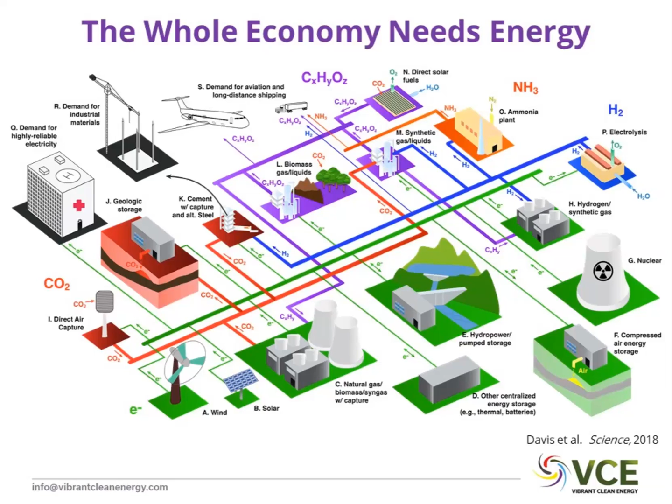This is a broad overview, very simplistic, not capturing every single last aspect, but it gives a framing of how I think of the problem, and how work has started from VCE in the electricity sector and is broadening out to all the other sectors. We model everything in four colors: green first, then blue, then purple for synthetic fuels, and finally red for direct capture of emissions. The way I conceptualize electrification is that we electrify by directly providing electrons for other sectors. There's light duty vehicles, heavy transportation, heating for both space and water, as well as electrifying cooking—what we'd call traditional demand—removing gas hobs to electrify them will change the profile of that electrification.

The fifth one's kind of a big one, which is hydrogen, which unlocks quite a lot of other areas. I still think of it as electrification. We're just adding an additional step, which is to then use hydrogen as a stable chemical bond to actually transport around or use for other areas where heat is either required or we actually need the hydrogen itself, for example, in ammonia or in producing steel. We actually want the hydrogen, not the heat or energy, or both.

And so we use this to blend with other sectors. So some people may not be able to get a space heat pump in their climates, and so we may want to use hydrogen to not have that be electrified fully.

I just want to note at the end, we do this kind of in the backdrop of we're also considering what climate is actually doing to all these sectors as we move forward in time. So one thing that we've added recently and been thinking about a lot is we have used a lot of historical data, and we continue to use historical data, but the future keeps changing. And depending on what path we're on, it might change very much how much we can rely on, say, heat pumps for heating versus needing hydrogen for heating demands. And I'll get onto that in a little bit towards the end. I don't want to go too deep into it.

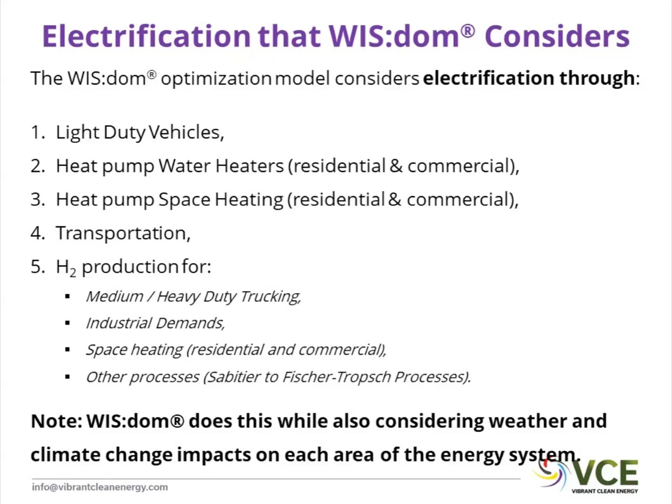So part of that is the model meeting electrification goals in the early years, but also that we're building out systems within the electricity sector to reduce emissions there as well, that then unlocks the potential later on for the next 20 years to really drive up electricity demand. And so in the electricity demand area, we're seeing a doubling of the number of electrons needed for the customers. And so that's quite a large increase.

And this is basically reaching around a 95% decarbonization of the electric sector. Sorry, 95% decarbonization of the energy sector by 2050.

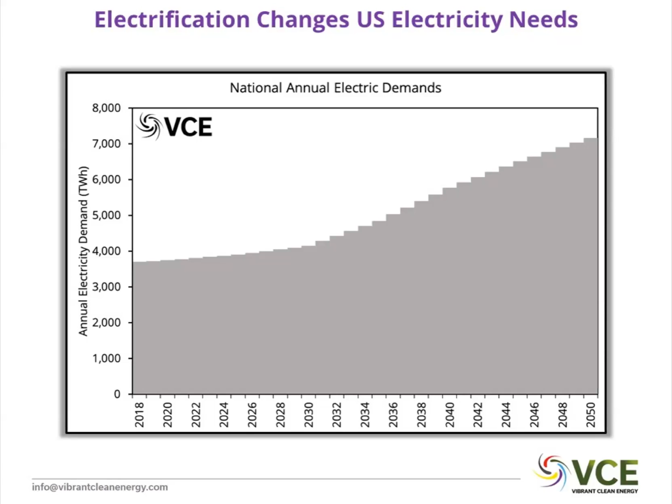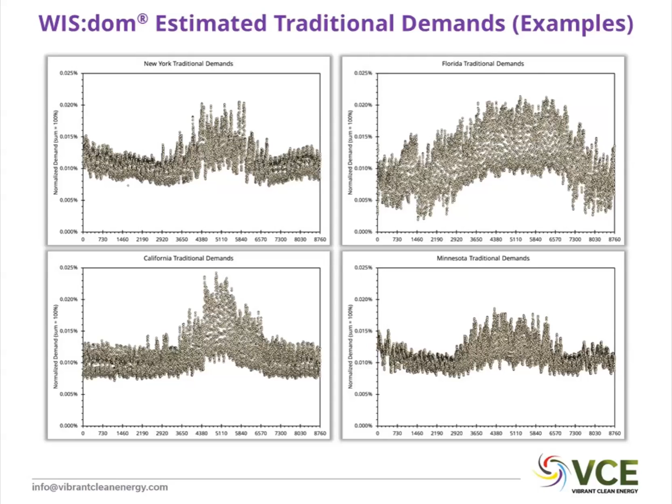And the reason I want to show this is just how different these shapes look when we bring the weather in. So these are simulated demands, but they're also tied to realities of what happened in the weather years that we're looking at. And we've stripped out any heating or transportation that's already in the electric sector because they're going to be modeled separately. And Florida looks very different to New York, which looks very different to Minnesota. And so already we're going to start seeing things change as we push forward through time in different states if the load grows at different rates.

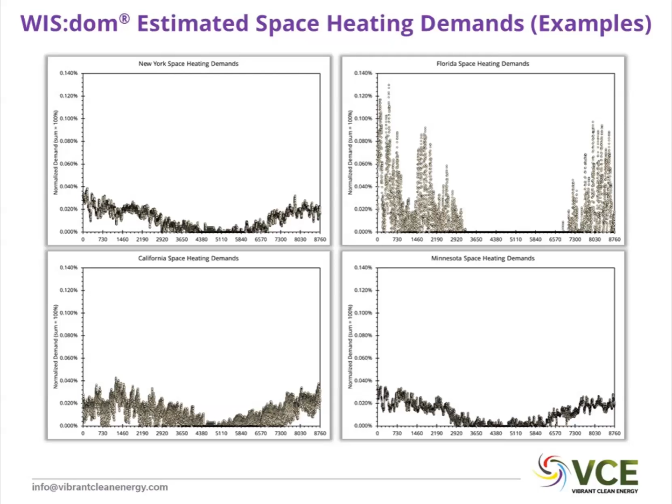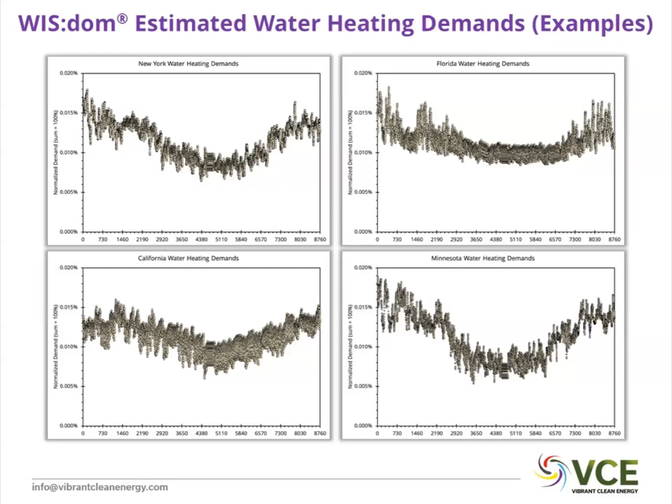And what we're doing here is we're tethering these to the weather as well. I'm going to show you the same thing here for heating. I won't go into too much detail here, but you can see each of the states is more similar now. And that's because for water heating, most of the technologies we use are very efficient. They're also well insulated, and so the differences aren't as big. But as you can see, there are differences even in those regions as well.

And then finally, looking at transportation loads, we bring in a bit of social behavior here as well, how people drive, how much activity there is in the transport sector. I'm going to caveat everything right now with, what's happening now in COVID-19 is going to be something that we're going to have to investigate a lot as a society in terms of how that will change the demands, both near term, but also how it might change things going forward. Maybe things will change, maybe they won't, maybe they'll just rebound back.

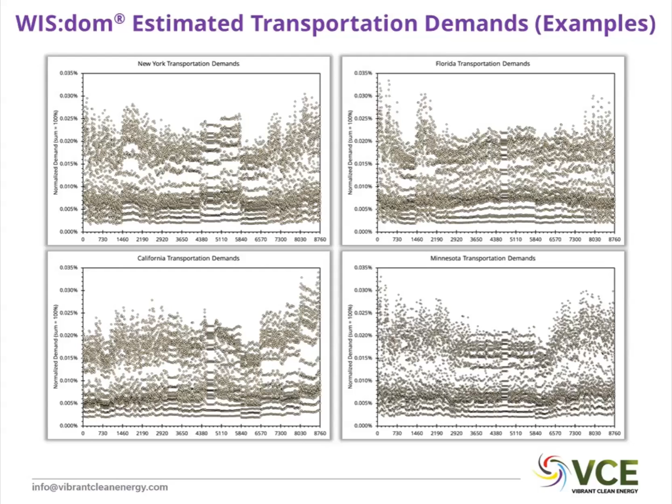But for certain, the transportation, we've been using historical data on how people move around at different times of the year for different regions. And I think that's going to change in at least the short term as well.

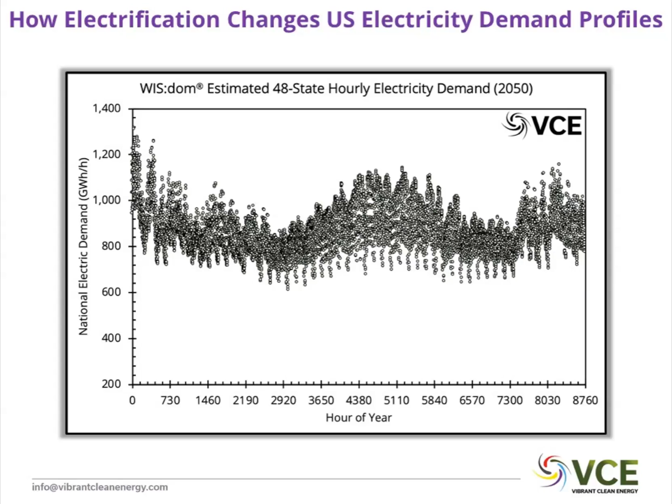And so then to 2050, we're now seeing the whole US being fairly substantially dominated by winter peak because we have all that heating that we need. But then we do also have a summer peak as well, but it's just not as high. And of course, regionally, this looks different, but we're seeing the aggregate now of all these different areas come together, as well as estimating what the actual energy consumption will be, as well as those normalized shapes.

For all this, we want to bring in detailed wind data sets for both the resource siting, but also how it then co-varies with these new loads that are coming in. Wind, for example, will be very highly correlated to space heating and water heating. And so we really want to be able to look at how they correlate and are anti-correlated, and how they then work together with other technologies that are also on the grid.

Like, for example, if we have to transport it, is the transmission constrained for some reason? Do we need to build more than we think we do? And aspects like that. But we need to be able to see geographically and then temporally how these co-oscillate and how they work together in tandem.

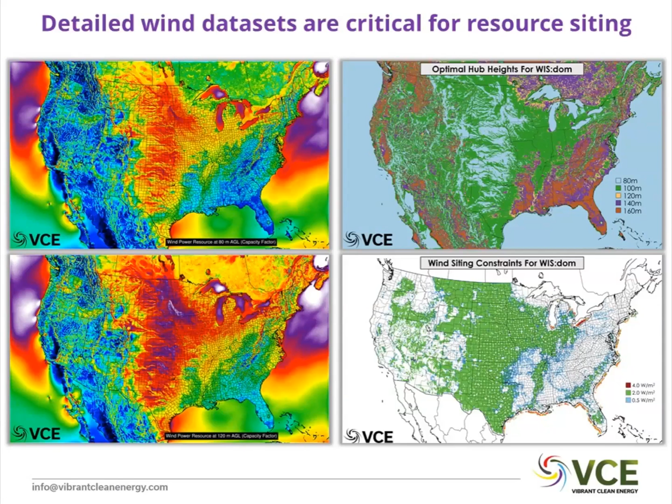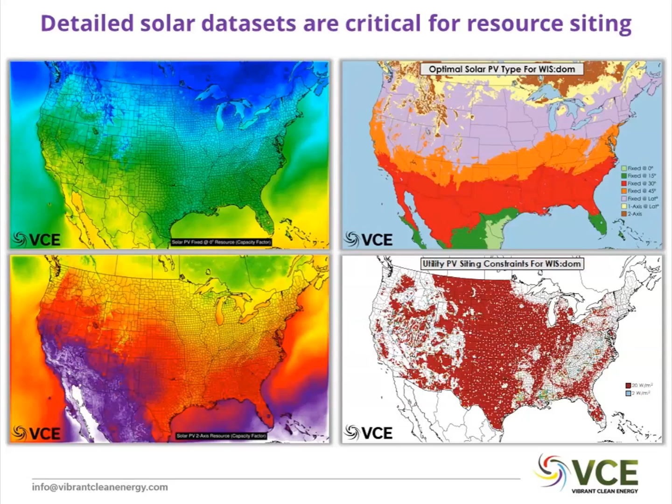And again, of course, our data sets will include the solar as well and how that might interact for that summer peak. But because we're now looking at that big winter peak, it really starts being a situation of the wind and solar actually needing to blend together, because there's this divergence between summer and winter for solar and wind that are very complementary in this paradigm.

The reason I go on about the hourly and sub-hourly detail is that it really matters when you're trying to heat a home, for example, with a heat pump, what's going on at a high resolution, because now the model is trying to think about how the demand flexibility might interact with the grid, because these new demands are actually more flexible, but there's constraints on those. If the temperature would drop too quickly if the heat pump was turned off, for example, the model needs to know that it can't do that, and so it has to bring in this high temporal data to know how it can capacity expand at the large scale as well.

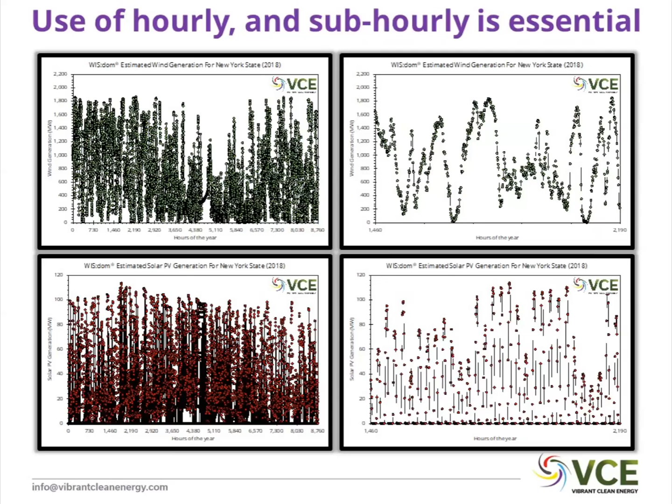And what I'm showing here is for New York State, a historical look at the wind and solar in that state, both annually, which is on the left for each hour, and then on the right, I've zoomed in to a short period to show how the oscillations in the wind are much slower moving than the oscillations in the solar. And I know it's not hugely easy to see on these plots, and hopefully when it's uploaded, it'll be easier for people to see.

Okay, and then I just wanted to mention that the storage behavior is important, how that changes both long-term and short-term storage, because they really will impact how these variable generations might come in. And when I talk about storage, I'm talking about both battery storage, but also chemical storage through hydrogen and other technologies for longer-term storage. And all we're showing here is an example of how the WIS:dom model is absorbing curtailed energy and dispatching it when the VREs drop down.

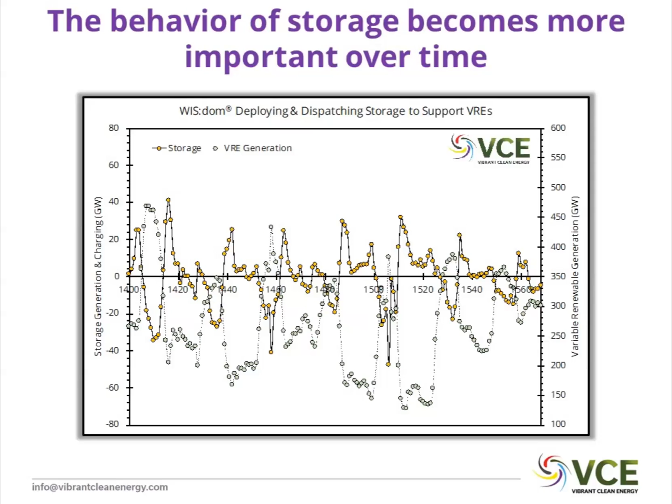And I've deliberately co-located the scale so you can more easily track the greens, which is the VRE, and then the orange, which is the storage output. And hopefully you'll see each time the renewables start dropping, the storage peaks up above the zero line.

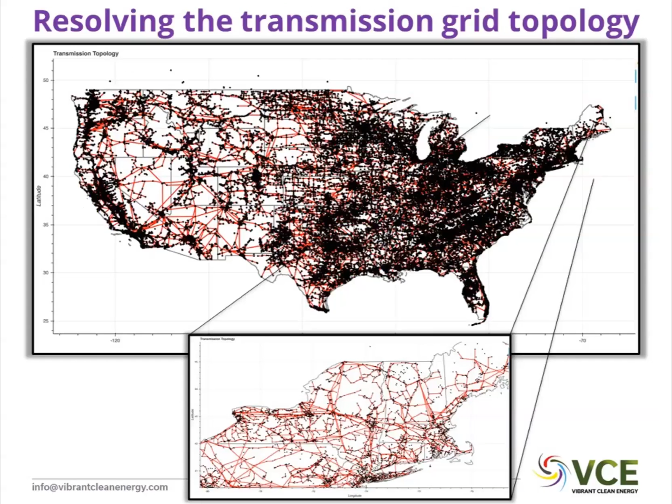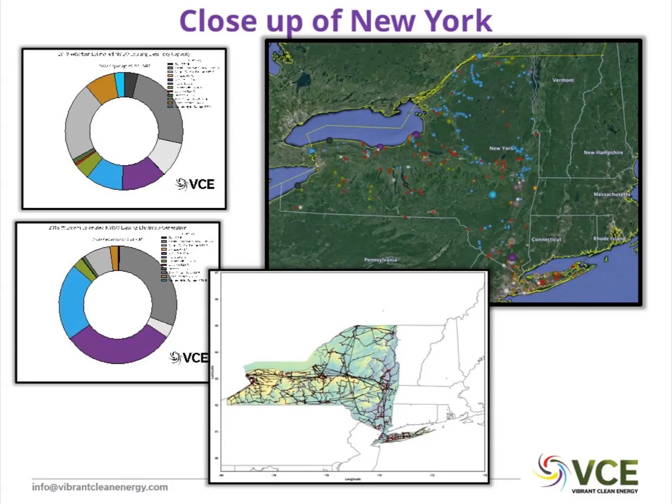The water supply for thermal generation and hydroelectric is another area that really needs consideration in terms of how it might cause forced outages and how other things might change in terms of the heating of the water. The transmission line rating and line losses is a big one as well. We build lots of renewables that are remote. How do we ship them? Do the line ratings get derated too much in a high RCP scenario, or can we find ways to ameliorate that?

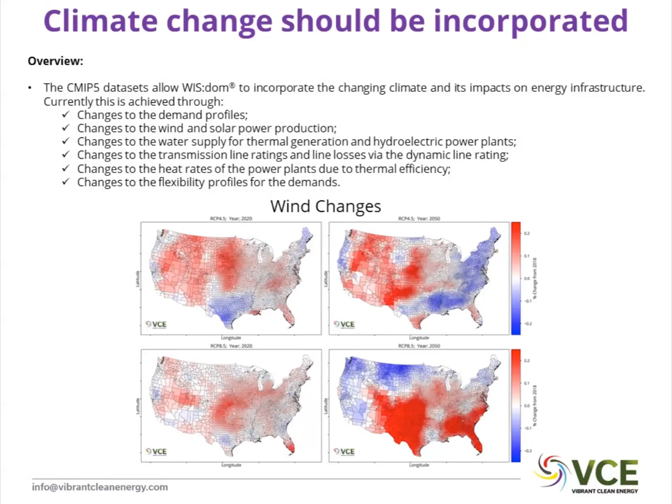But the increase that you see in the plains looks good, and it is because it happens at night. And so if we have electrification, it's good. If we don't have electrification, it's even worse than before, because we have the bigger divergence between night and day than we've had before.

I know there's a lot there, and I've gone into a bit of detail, but I want to give an overarching understanding of these things, how they come together. They may be beneficial, but we have to be considerate of the constraints that are then applied as well. And then how they link together is really important. How they superimpose on top of each other is where the benefits really start to come out.

So I'm just going to show a quick example here. I'm not going to spend long on it because I know I've taken a bit too much time. But I wanted to show the results of an internal study looking at deep decarbonization of the CONUS. This is going forward through time, 2018 to 2050, and the different technologies are stacked. This is capacity on the grid. The left shaded bar is the original peak demand, and the right shaded is the new demand. The model picks that new demand.

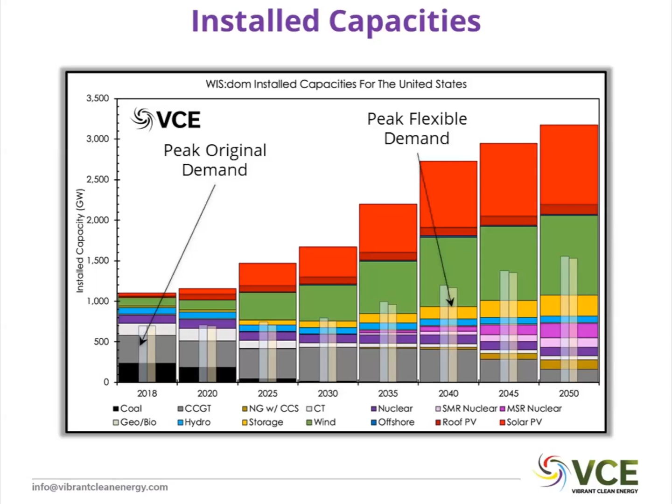And so this gas here, although traditionally we might say we don't want any gas by 2050, actually we've removed it out of other sectors which are less efficient and have made it more concentrated, which then, if we wanted to do something like CCS or DAC, we could make it more economical.

If we look at it as the state breakdown, this is what 2018 looks like, and all I wanted to show was how it changes to 2050. So that's 2018 here. 2050 changes things quite a lot. And the reason it changes quite a lot is that we have a lot of new technologies coming in. A lot of wind and solar is really participating in this new grid. And what that means is there's new technologies that are absorbing and using that power.

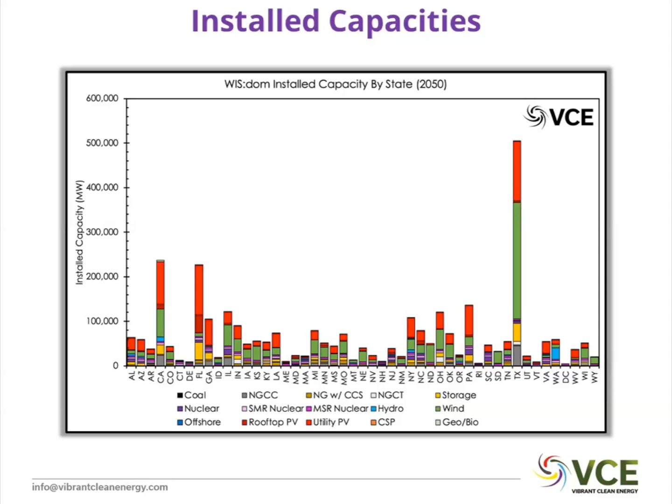This is trying to show how the US would change by 2040. I'm not showing 2050 here because there's a lot more novel technologies that come in by 2050. But by 2040, hopefully, compared to our earlier plots, you can see there's a lot of change going on. We have a lot more offshore wind. The onshore wind has got more diverse. It's spread out more across the country.

Onshore wind is green, by the way, blue is offshore. Yellow is storage facilities that are being built. So hopefully you can see that's a new thing. And then the pinks are novel technologies that are being installed around the US as well.

All I'm trying to show here is that where you looked at those capacity maps earlier for wind and solar, you'll notice there isn't as much wind and solar in these few states in the central plains. That's partly because of transmission needs, but also because the new sectors coming in actually allow you to have renewables closer to the demands than you may traditionally think under the current electric paradigm.

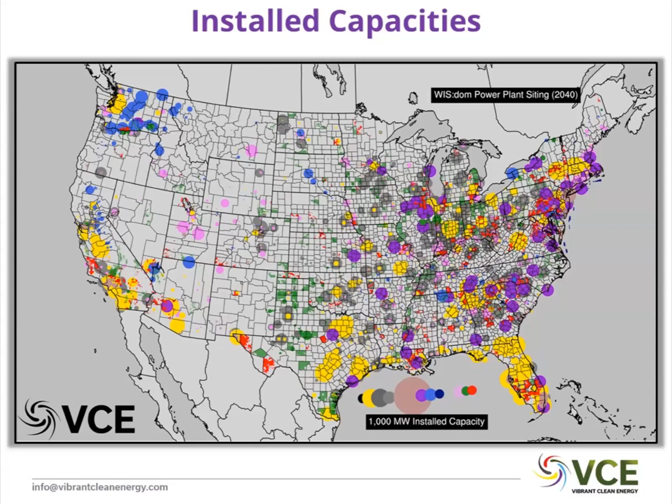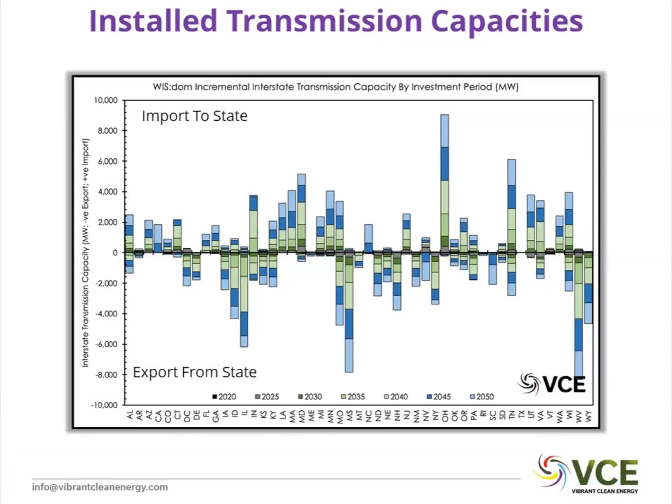We do need transmission, of course. I think that's going to be a recurring theme through all energy needs. If everything flows through electricity, which it's looking like it may need to, the linchpin in all that is building some transmission. We really need more transmission built, and it'll make everything easier, particularly if we're relying on more of the economy being supported by electricity.

I just want to show the emissions here and how they fall in the electric sector. We get roughly a 95% reduction in the electric sector by 2050, and that remaining gas is mainly there for backup and peaking capacity.

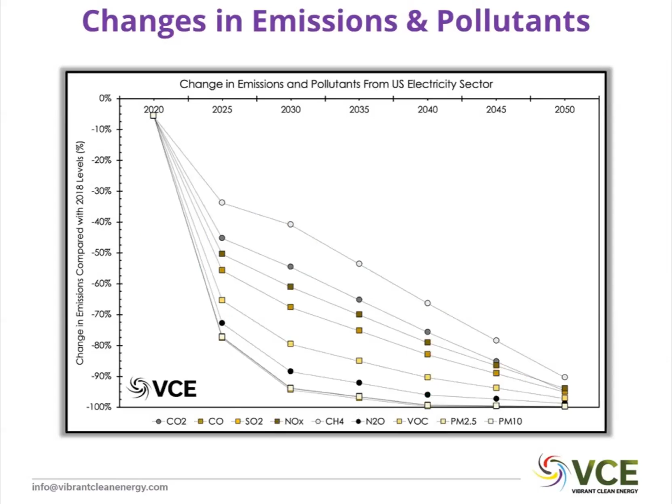To show that as a generation share of resources, you'll notice around half of the energy comes from renewables and around half from other technologies. We've done other studies where we've looked at just renewables and how that might look different, and I've talked about that before, so I don't want to repeat it here. But basically we see the share flattening off around 50 to 60%, and that's predicated on the fact that we're electrifying and increasing demand a lot.

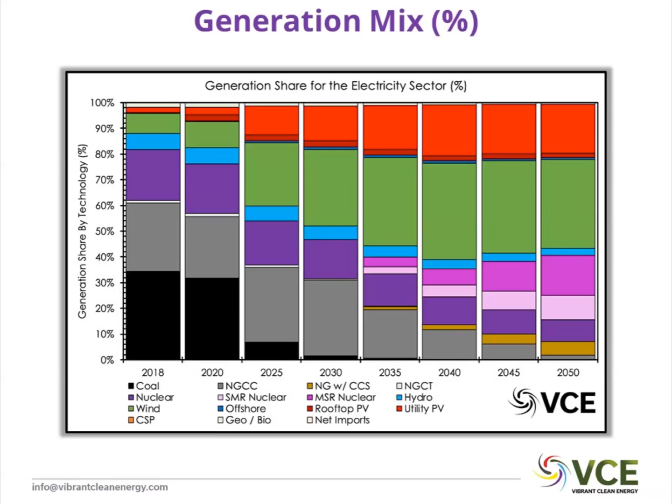So 60% of 7,000 terawatt hours is more than the demand is today, and so we're producing a lot of renewables here. These other technologies are coming in because we're needing to firm up the capacity needs in this particular scenario.

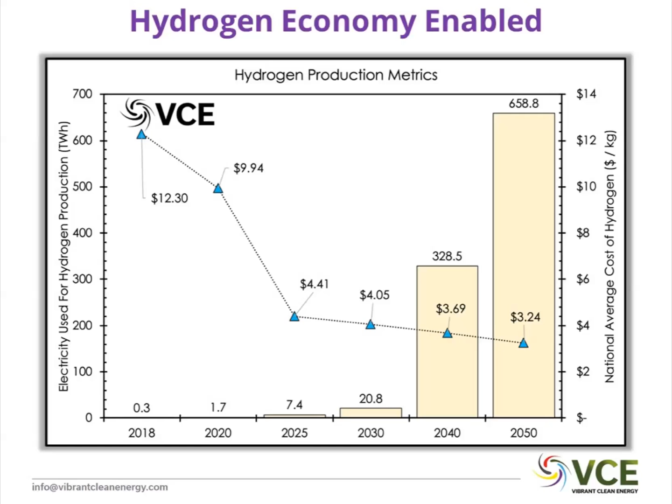So I will stop there and allow others to ask questions or to move on. Thank you.

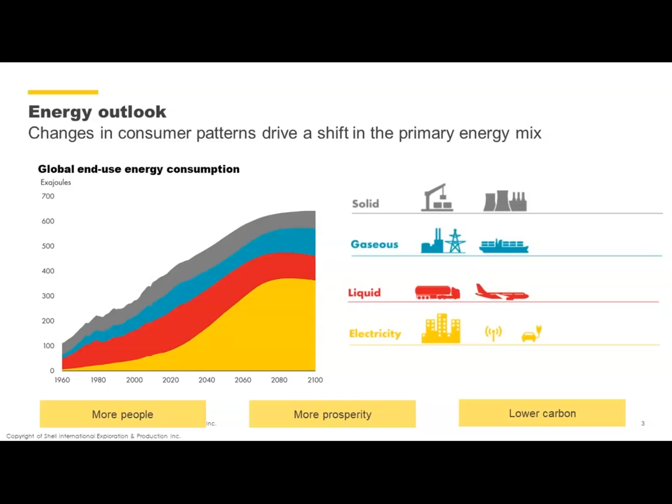When you start thinking about electricity as your primary energy source, it really starts to change the paradigm. Electricity is very high quality energy, and up to this point, when we've had to convert fuels into that electricity, it's very dear. It's purpose-driven in its use. We don't want to use it for a lot of things because it's very costly to get it to that form. But when you start with solar, when you start with wind, and you've got additional choices now, especially as we start thinking about industrial conversions, whether you go to hydrogen, higher grade chemicals, or hydrocarbon fuels, you've got a lot of optionality at the price of efficiency. So then the question becomes, how do we really start to think about this balance and drive electricity as our primary energy source?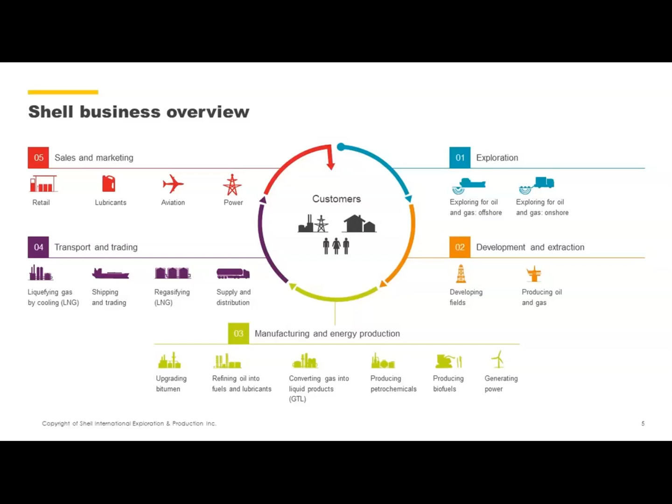To go a little deeper into chemicals, because I find this, as a chemical engineer, very helpful in terms of framing what types of options and requirements are needed as we think about process designs, process engineering, and other pieces, to really say what are the building blocks, how do we go from feedstocks all the way through to finished products.

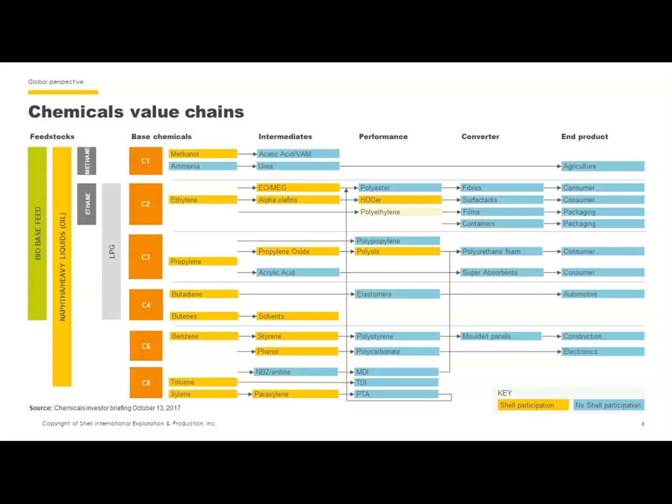The other point I wanted to make on this chart is that Shell has participation at a lot of points along this value chain. As a consequence, each of these has different process lineups, different considerations, different customer bases, different operational strategies. So we really have the opportunity and the need to think about these challenges very holistically, whether within chemicals, within electrification, or at the intersection of the two.

You've got everything from generation, in the top left, energy production, whether that's solar, onshore wind, offshore wind, to usage, trading, optimization - all of that comes into play.

While I've listed a number of investments and acquisitions made over the past 5 years, I also wanted to mention that Shell has actually been active in the power sector for over 20 years, particularly in North America, through both onshore wind operations as well as electricity trading and supply.

To highlight a few of these investments and acquisitions, to give a sense of the scale and different dimensions we think about: large-scale offshore wind, that's Borssele 3 and 4 in the North Sea off the coast of the Netherlands. Large-scale solar, that's Silicon Ranch in the United States.

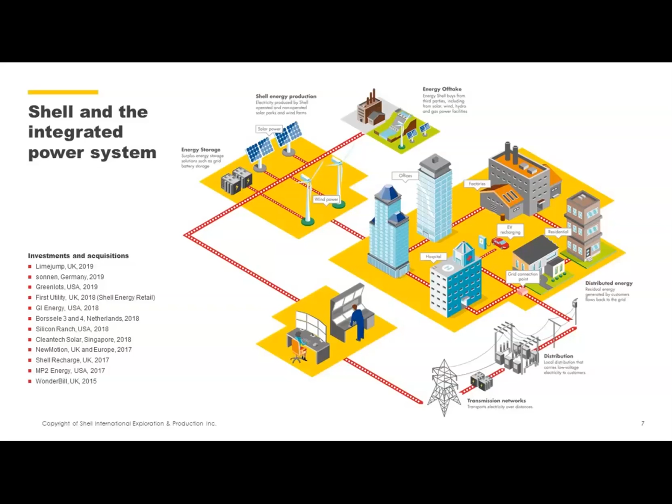You can think about residential energy storage and optimization - that's Sonnen in Germany, 2019. You can think about electric vehicle charging - New Motion in the Netherlands, Greenlots in the United States, et cetera. So just to give you a sense of the range of options and points in the value chain we are looking at, as well as the challenges our organization is technically looking to solve.

To talk again about the concept of time scales, length scales, size scales, and how these intersect - for me as a chemical engineer, when I first started working in the electrification sector and looking around energy system integration, one of the things that struck me was that when we talk about operational timescales in the electric grid and power sector, you also have a lot of analogous timescales, length scales, and size scales in manufacturing.

When you're looking at the design of a new plant, taking things into account from a very long-term perspective - what is the demand for the product - then more granularly, what does the plant lineup need to look like, how does each unit operation need to line up - you're able to work in a way analogous to system capacity pieces, whether we're talking seasonality, weekly, daily, or even down to sub-minute operations.

When you're looking at a process, you're trying to optimize and control at these shorter time scales, whereas when looking at larger scale dynamics in the industry overall, you're much more on the left-hand side.

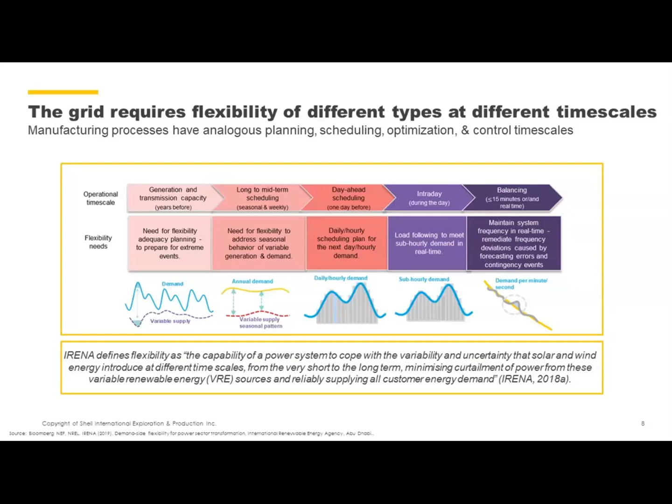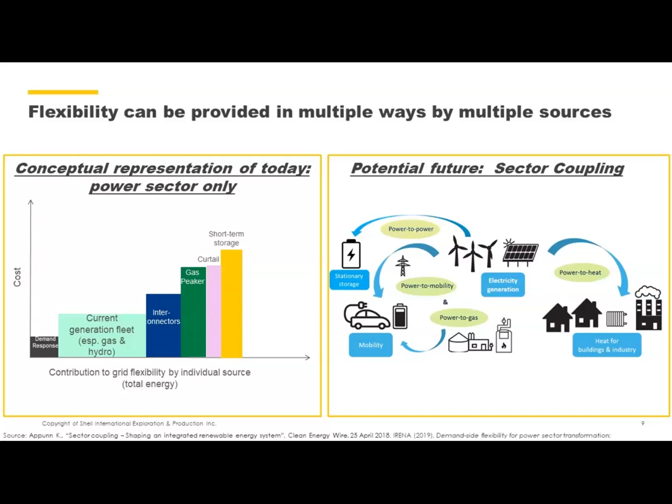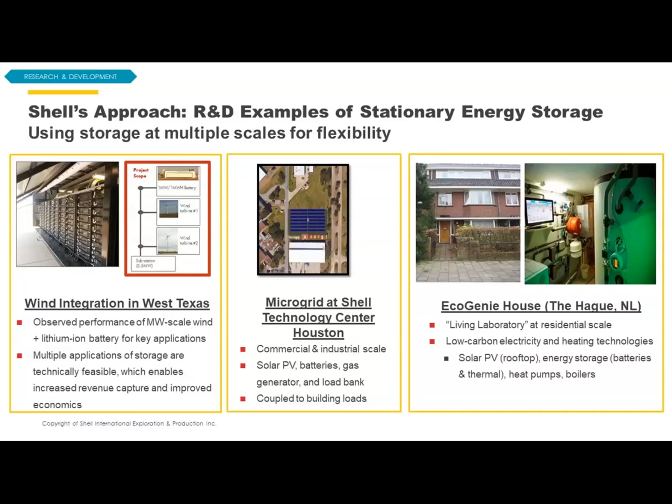So through our microgrid at Shell Technology Center Houston, we look at the role of solar and different types of storage, flexibility, coupling with natural gas, building loads and things of that sort, to really try to look at the various dynamics that are taking place at that scale. Then finally, in also looking at the coupling of heat and electrification, we have our residential living laboratory in the Netherlands, where we actually have a small townhouse where we look at all of these different options for residential applications. So again, this combination of time scale, length scale, size scale.

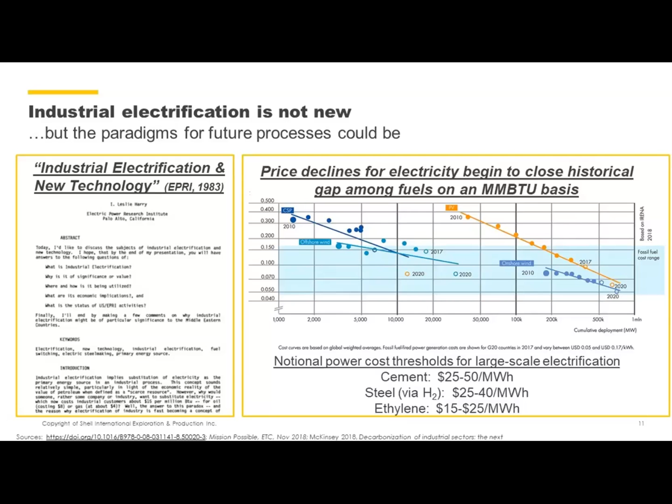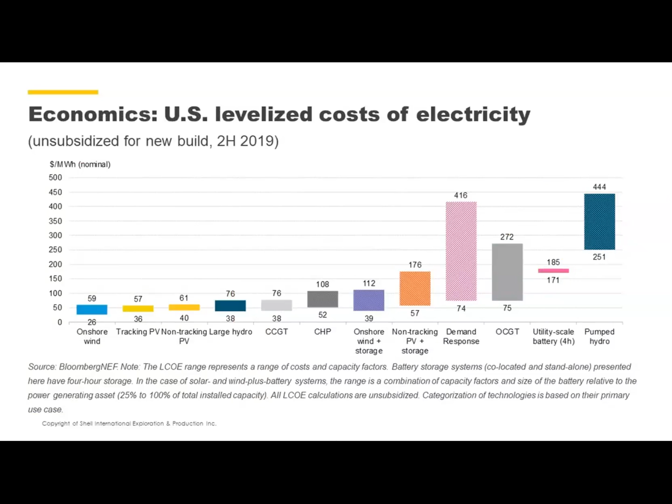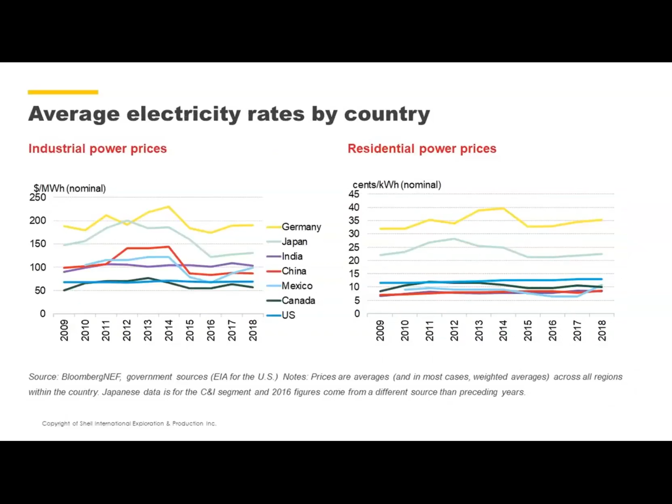And what we're able to see in the next slide is that, in fact, we're actually starting to hit some of these at the low end. So again, this is from Bloomberg New Energy Finance. When you're talking about getting into that $25 to $50 a megawatt hour range, we're starting to see that for a number of different options. But for industrial power to really be able to move the needle in some of these places, we still have very much a strong regional difference. You can see differences on the left in particular for industrial, as well as what we see for residential. And so trying to get some of these things matched up in terms of what we're seeing for wholesale versus what the industrial customers are paying, still to be worked out how we can really take advantage of this.

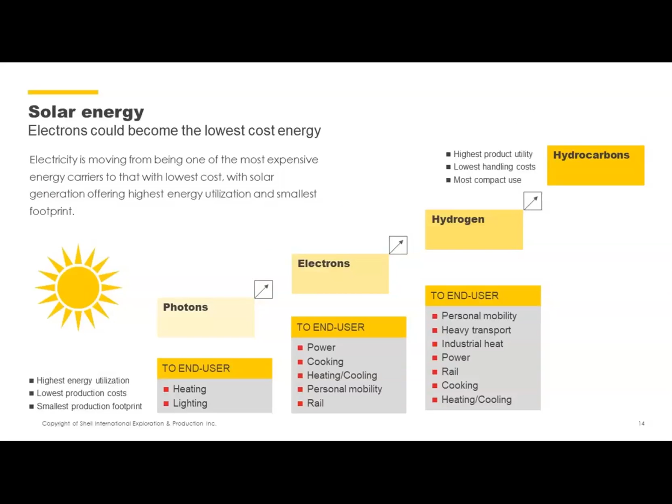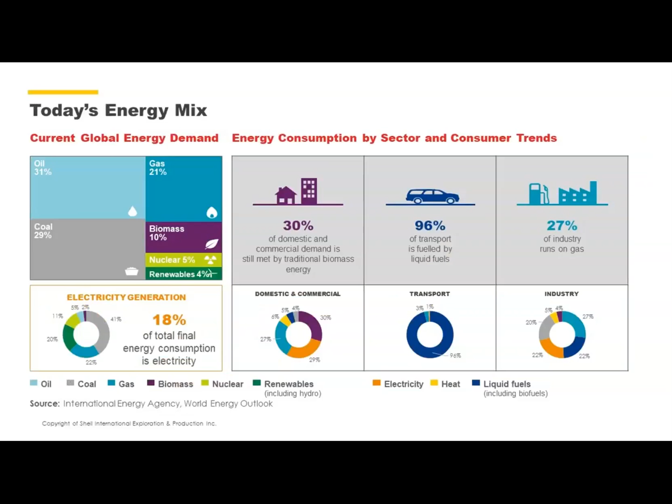I've spoken a little bit about this already in terms of when you do have solar, renewables, things from that standpoint, how do you make these choices as you go up the level of complexity in the value chain? And so when we talk about today's energy mix and where can we start to really look at electrification, we start to see a bit more where these different fuels are used, where electricity is already being used. And I think a slide that also helps tell the story is our next one, where in particular on the left, we're talking about U.S. energy use by sector. Everything below the black line is electrified already. Everything above is not. And so we really see industry and transportation being strongly behind the built environment already. And when we dig a little bit deeper into what's going on here, we start to see some real opportunities in terms of what fuels are already in place and where electrification may be able to play a role in different fuel displacements.

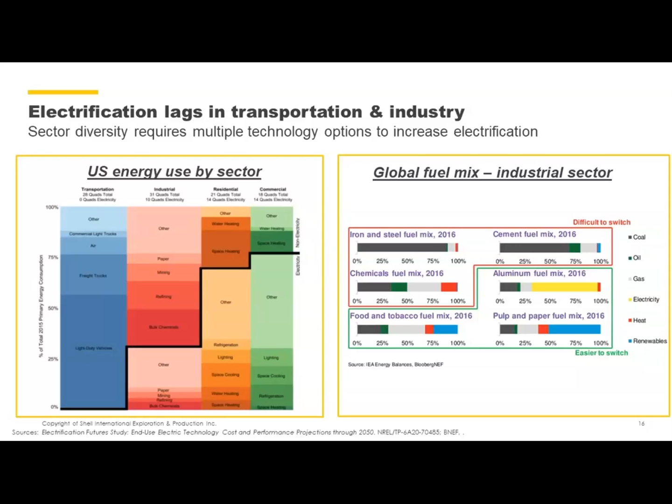So again, I talked about electrification not being new. When we go back and we look at industrial sectors and applications, process units in particular, where we have used electricity for a number of years, it's A, a really long time, and B, these are areas where we've really started to unlock a lot of the flexibility, and more of that will be shared in the following talk as well.

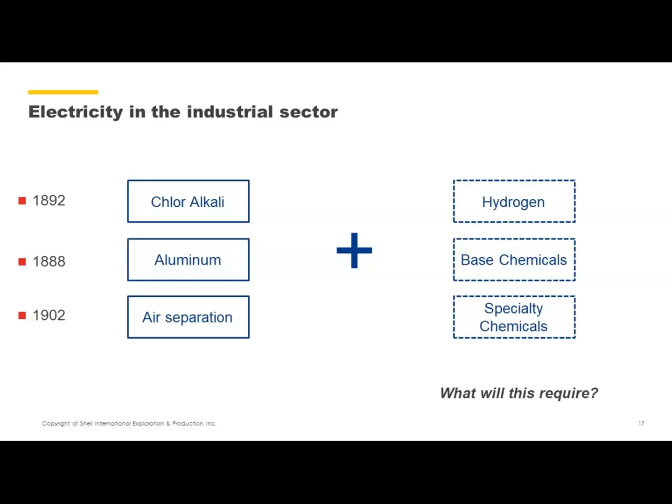And so one of the key questions that we keep in mind from a technology perspective is when you take what has been done where electricity has really played a significant role in the past, how do we now really start to think about that for some of these next types of chemicals that really help to form the backbone of what we're doing going forward?

So heat is a huge one. It was alluded to in some of the other discussion points, but process heating is actually a really big lever as we look at the industrial sector. And this really moves into different types of sectors, low, medium, and high grade heat. And the good news is that from a potential feasibility perspective, electricity really is able to drive and deliver a lot of the temperatures that we need.

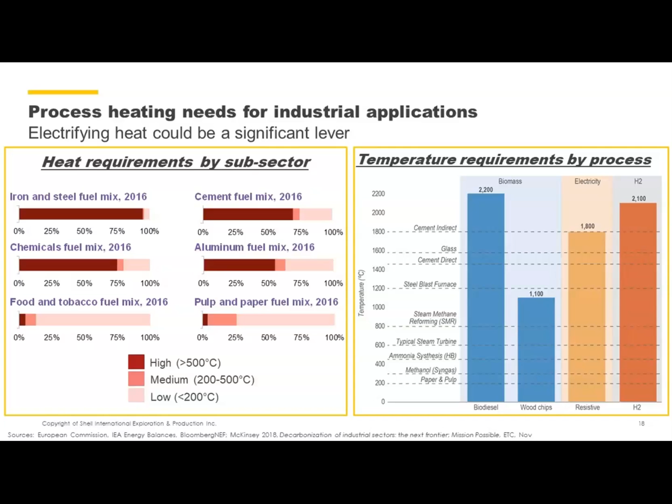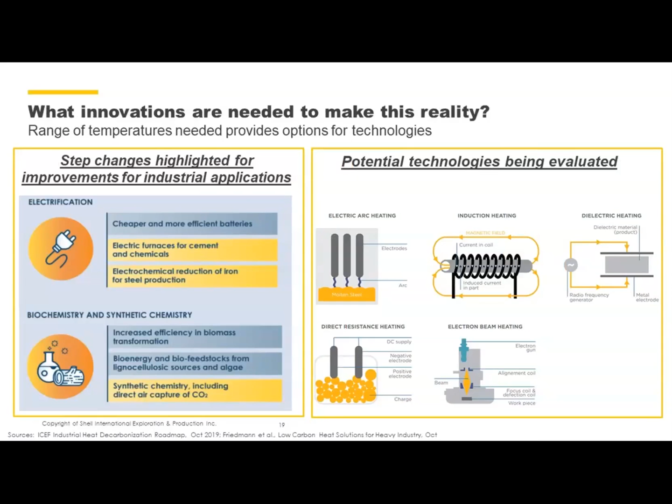That said, in terms of doing this from a very practical, robust, long-lived operability perspective that we're used to in the traditional process industries, there's still a ways to go. On the right, I'm showing some different process technologies that have been summarized in the literature for different types of high-grade heat. On the left, I'm showing some examples of where you could potentially start to think about how you approach it and where deep research is needed to go further into the industrial sector.

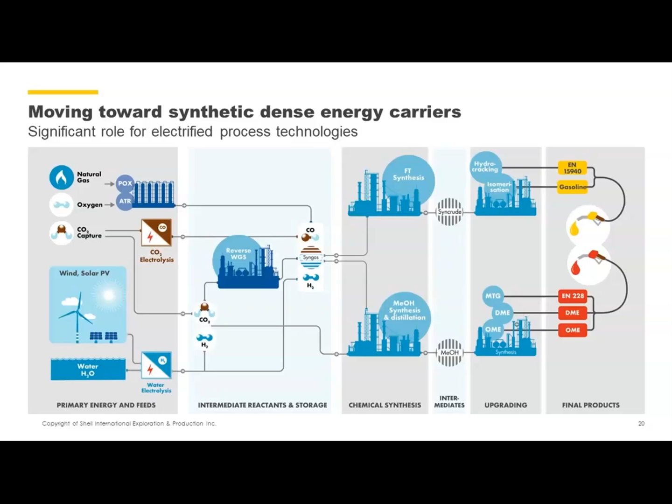A lot of this, as has been alluded to before, can also be put to use in terms of synthetic energy carriers, in particular dense energy carriers such as power to liquids, solar fuels, and things of that sort. This is an area where Shell has active research and development work already ongoing. And again, coming back to where electrification fits in, you can look at capturing, conversions, hydrogen and the various downstream processing as well. So this is a more integrated process view of where some of these building blocks come into play.

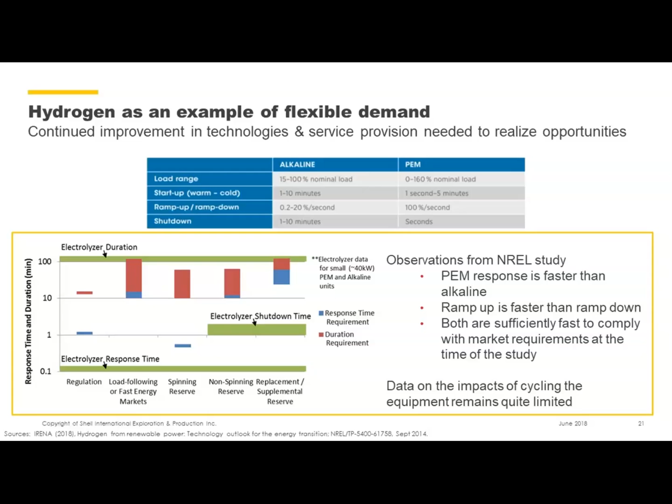And really, the big answer is yes, you absolutely can do that. Certain technologies are inherently a little more able to do this, but in general, you're able to meet the demands of the market. One of the big open questions, though, and this is true for a lot of process technologies, especially at the unit operations level, is what happens over the long term? Because in the chemical industry, you're talking about assets that are in place for a number of years, sometimes even longer than in the electric power industry. Yes, through retrofits and turnarounds you'll upgrade, but overall you're looking at a very long-lived asset. So what this means for these new technologies is still very much under research.

Finally, I just wanted to tie some things back together in terms of this process and electricity piece. The articles on the left are from the chemical process optimization literature, and started laying the groundwork in the early 80s and through today on this concept of resiliency in process design. So the idea of being flexible, operable, and controllable across these different timescales, and what it takes to make that happen from process design all the way through to build and operation.

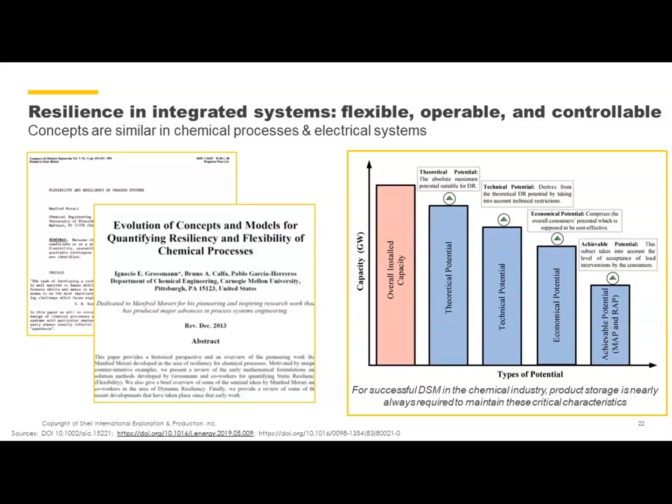One of the things I wanted to highlight: we've talked a little about demand response, and this chart starts to show, as you try to implement it, some of the barriers and challenges you can run up against, and how theoretical and realized are often two very different things. To get back to this flexible, operable, and controllable piece, in most places where it's been implemented, the role of storage really comes into play. In the power sector, we typically think of power storage, but how we use not just hydrogen, but also other embedded flexibility throughout the process industries to help manage and balance these things is a current interest and area of active research as well.

So finally, just to wrap up, wanted to highlight the fact that we do actually have some unique synergies between the chemical process industries and electrification. Not always obvious, but they are in fact there, and really excited to be able to share this with you today, because I really felt like this topic was an intersection of quite a lot of things that I've worked on over my career, and it's just an incredibly exciting area. Talking also about the different things that we have the potential to play key roles in: products, process, and services.

And finally, one last thing to add that was actually announced today. Our CEO, as part of our Responsible Investor Day, which was earlier this morning, Central European time, announced our ambition to be net zero emissions from our own operations by 2050 or sooner. And one of the big levers that was mentioned was zero and low carbon electricity and steam, in addition to hydrogen and biomass to help support that.

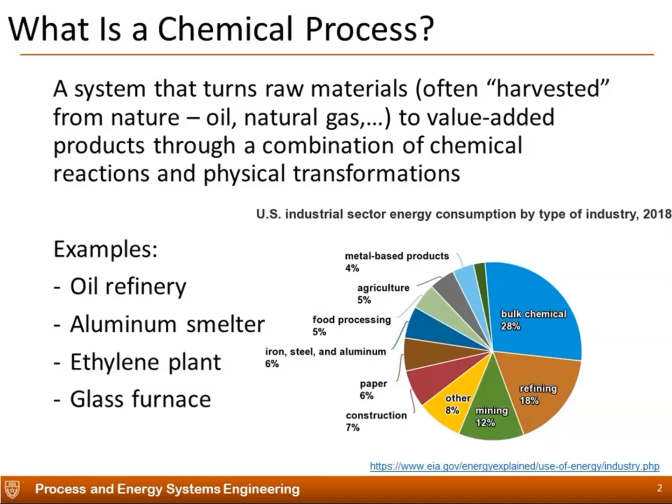These chemical and physical transformations are effected with external energy input. The basic example is that you would use electricity to generate heat, as an arc furnace would do. We don't necessarily want to do resistive coil heating, but microwave heating, for example, has been explored. Usually that kind of heating has been deemed too expensive in the past, but it doesn't mean that it won't become interesting in the future.

Electricity is also used to support certain types of transformations that just wouldn't be possible otherwise: electrochemical reactions, for example electrolysis to produce chlorine or aluminum. And then there's also the use of electricity to generate work. Compression is a typical example, and we'll talk about a few plants where compression is a key transformation.

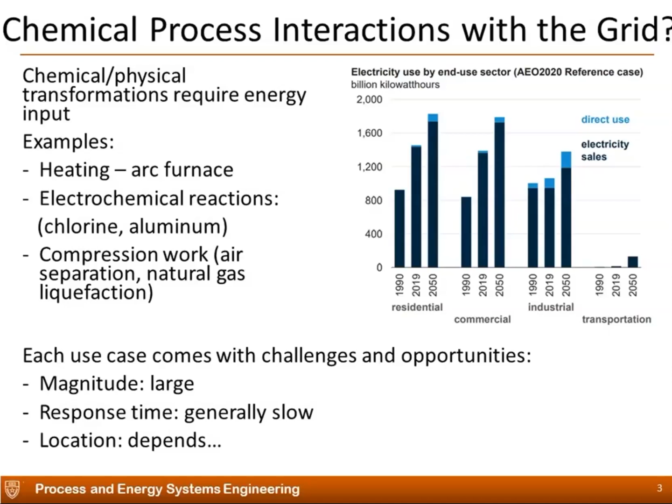So with that in mind, we could go ahead and discuss a few examples just to put things in perspective. I'll start with magnitude. I'll give three examples of plants that rely heavily on electricity, and the first two have an almost exclusive use of electricity as the energy source. Air separation is not only useful for providing oxygen, argon, and nitrogen, which are used as utilities in other industrial sectors, but it's also a pretty interesting partner for interactions with the power grid.

It's a cryogenic process, which means it's done at very low temperatures, and it relies on liquefying air from the atmosphere and then distilling it to produce the three components I mentioned. To give you an idea of what a plant like this consumes, to make a ton of oxygen it's about 350 kilowatt hours per ton. 5,000 tons per day is not the typical capacity, but there are plants that go up to that. For an oxygen plant connected to a steel mill, you're probably looking at a 150 to 300 ton per day facility.

Chloralkali is the main source of chlorine for various other purposes, such as the production of polymers like polyvinyl chloride, water treatment, and so on. The way it's done is through the electrolysis of a solution of table salt or brine, and that has caustic or sodium hydroxide as a byproduct.

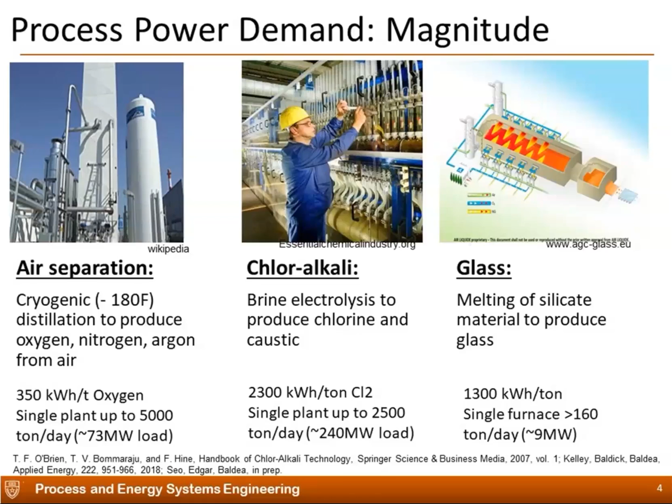So going from magnitude to speed of response, I think we really need to consider exactly how chemical plants operate. Elizabeth has already hinted at this in her presentation - actually, the two of us had a brief discussion to coordinate what we're going to talk about, and I really appreciate that. So the operation of chemical plants is a highly hierarchical affair.

There is a business decision layer, which deals with what to make and when to make it - that's production planning and production scheduling. These business drivers do take precedence, because there are orders to be fulfilled and product to be delivered. So there has to be a relatively strong financial incentive to interfere with or override those decisions when we talk about diverting the operation of a chemical plant to interact with the grid.

Then there's another aspect here, which is control. What these business decisions result in is a set of trajectories, targets, or set points for a control system. The control system has a crucial role in first meeting those targets, but also in maintaining the safe, stable operation of the plant, particularly in the face of disturbances. In my experience interacting with different chemical industries, it's been very clear that they're not willing to compromise in any way on the safety of operation or quality of product under any circumstances, and that includes interacting with the power grid.

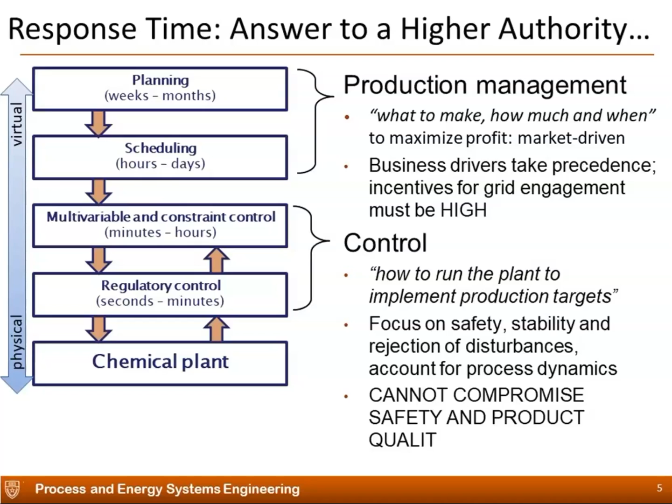So this hierarchy of timescales also corresponds with the dynamics of the plant itself in many ways. If we think about when and how a chemical plant would have to respond, we have to think about how it could interact with the grid.

Well, if you're a chemical plant, really what you want to do is produce less when electricity is expensive and produce more when electricity is cheap.

Basically, what would happen in a production scenario where these prices are known or can be anticipated is a manufacturer could decide to up production during the early hours of the morning when demand on the grid is low and electricity is cheap, make more product than actually needed at that moment, store it, and then drop the production rate when electricity is expensive and use that stored product to meet demand.

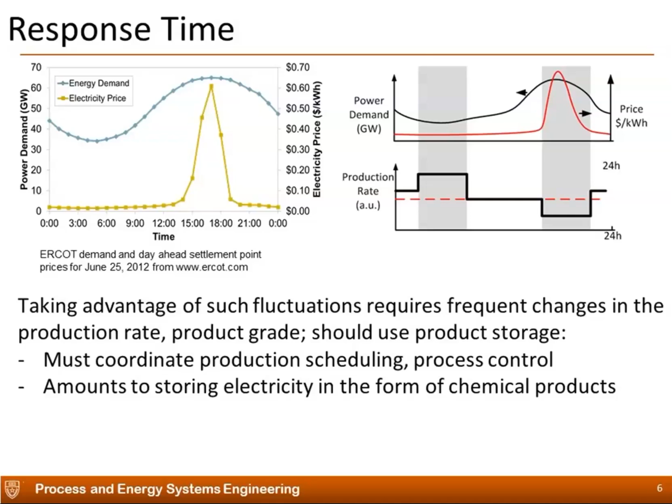Michael, can I interrupt you for just a moment? We're getting a lot of interference on your audio. Could you try something? I'm not sure what I can do here. Should I call it? It's already better. Okay, yeah. I'll just hold the microphone very close to me. Is that okay? Yeah, I think it's better. Okay, I apologize, and thanks for pointing that out. Should I continue?

Yes, please do. So talking about air separation, why is this interesting? Air separation makes up about 2% of U.S. electricity demand, industrial demand. The way we can store electricity, or energy, is by switching between making a gas product, gas nitrogen, versus liquid nitrogen.

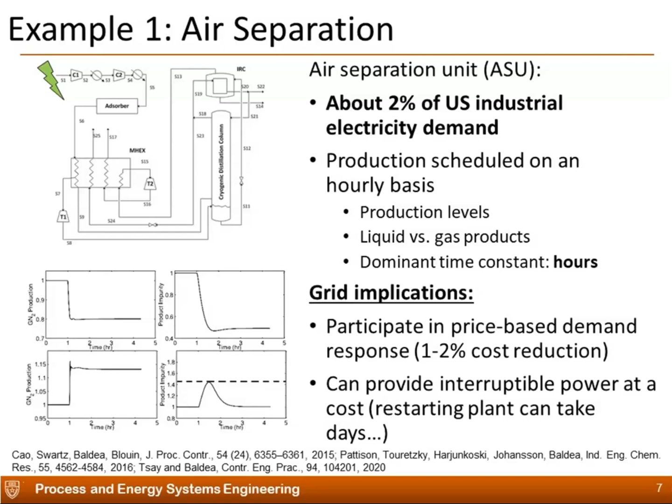Talking again about dynamics, we can look at chlor-alkali. Again, this is about 2% of U.S. electricity demand, so it's also a needle mover. The storage strategy here is similar: we can take gas chlorine, liquefy it, store it, and make more when electricity is cheap, and make less when it's expensive.

The interesting thing here is that the dynamics of this plant are almost instantaneous. We can manipulate the current density through the electrolysis cells very easily. The dominant time constant of the plant is still on the order of hours because of thermal inertia, but from the point of view of modulating operation and shutting cells down, this could be done very easily.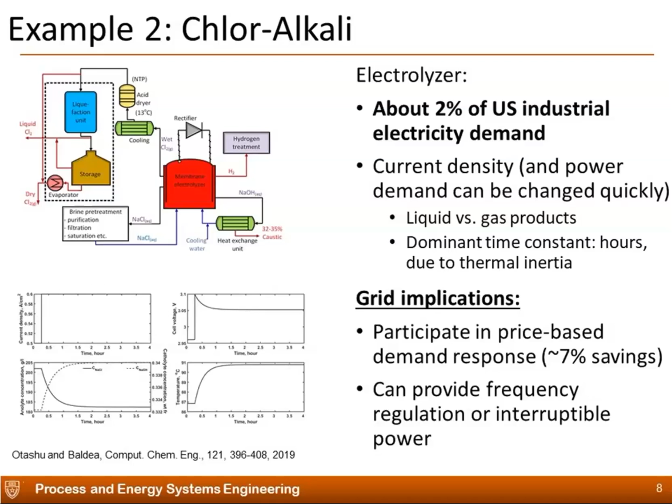So this type of plant can also participate in price-based demand response. We've noticed in our studies that because it's a much nimbler system, the savings here can be quite significant. And then it can provide frequency regulation and interruptible power service, unlike the ASU that I discussed before.

Now, one of the last considerations I want to cover in terms of what the chemical process can do in interacting with the grid. This is an ongoing question, research that we're still carrying out. I think we need a lot more understanding of how we can utilize a chemical plant as a grid resource, as opposed to a unilateral, self-directed demand response resource, or price-based.

We also need to think about who actually makes the decision as to how a chemical plant operates. That's a key question that as of yet does not have a good answer in my mind. If we think about independent operation by chemical plant operators versus cooperative operation, where grid operators would set or make some of the production decisions, this makes an important difference.

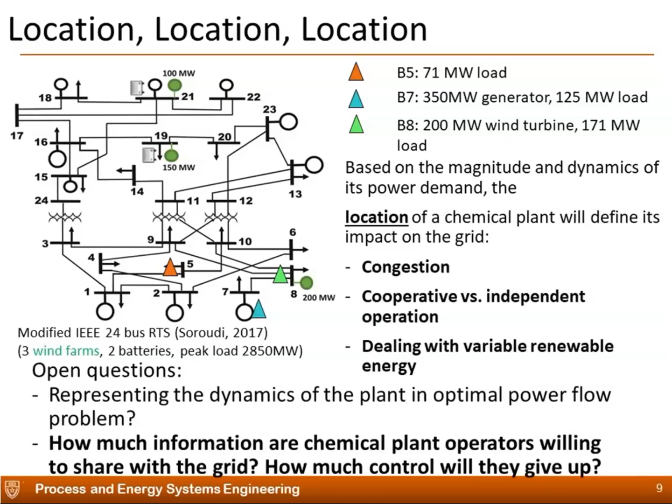So it's probably time for me to conclude. I think I managed to convey that chemical plants are actually a big player in industrial electricity use. They can support grid operations, and they do, but we have to be mindful of several things particular to the chemical industry. One of them is safety and product quality, which are critical to process operations, and will take precedence over any other initiative.

Their dynamics are different, and 'chemical plant' is sort of a misnomer—there are many types of chemical plants, and based on the operations they perform on raw materials, they will have different dynamics, different response times, and different constraints, which all need to be accounted for when we envision any kind of interaction with the grid. Finally, the plant's location in the grid topology will also bear a big influence on deciding how to support the grid.

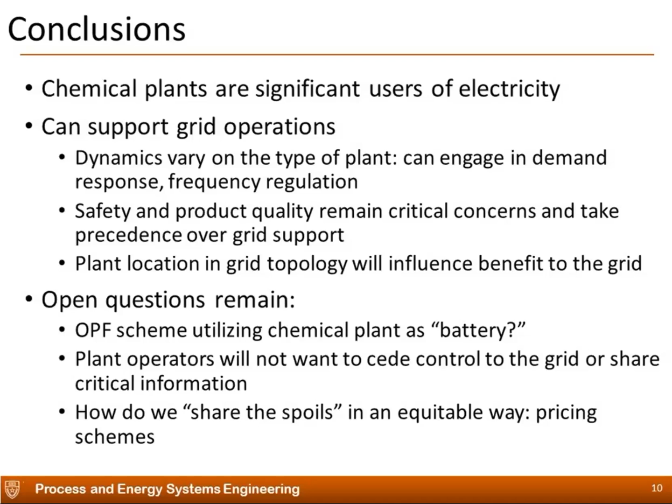So there are open questions that remain here. What should be the optimal power flow problem or scheme for fully exploiting a chemical plant connected to the grid? How much control are operators willing to give up? And how do we share the spoils equitably? What pricing schemes could be offered to chemical plant operators as an incentive to engage in any kind of support scheme for grid operations?